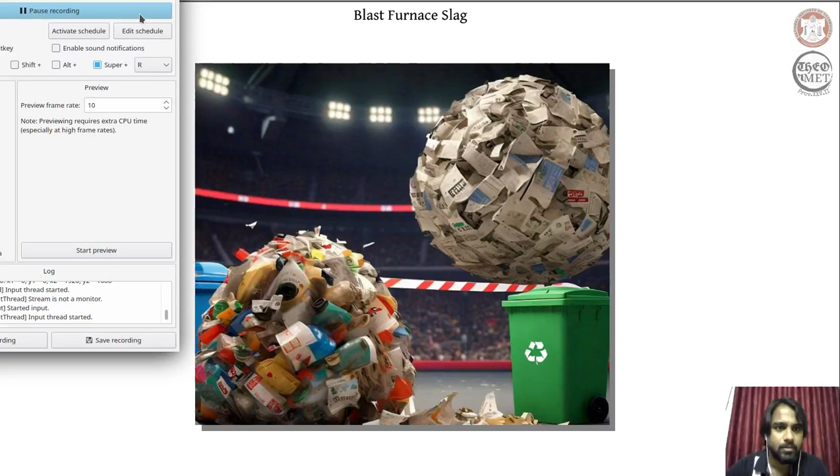Have you heard of this term anthropogenic? Despite its meaning, this term is very rarely used in a positive context. Anthropogenic means something that comes out of collective human activities. Often, pollution is something that is referred to as anthropogenic in nature.

But when you consider even pollution, the anthropogenic activity was not to cause pollution. The intent behind the collective human effort was not to cause pollution. The mind that gave us this anthropogenic activity did not intend to cause pollution. The collective human mind that unfortunately led to this pollution gave us an efficient and a safe mode of transportation.

So the transportation and the different modes of transportation we see is also anthropogenic in nature. And this mind that gave us an efficient, safer and at times luxurious mode of transportation, if directed properly, if motivated properly, can also come up with ways to manage the ill effect of the positive thing that was generated through this anthropogenic activity, this collective human effort.

So, to put it simply, the effort that gave us good modes of transportation, the same anthropogenic effort can be managed or directed towards managing the ill effect of the transportation.

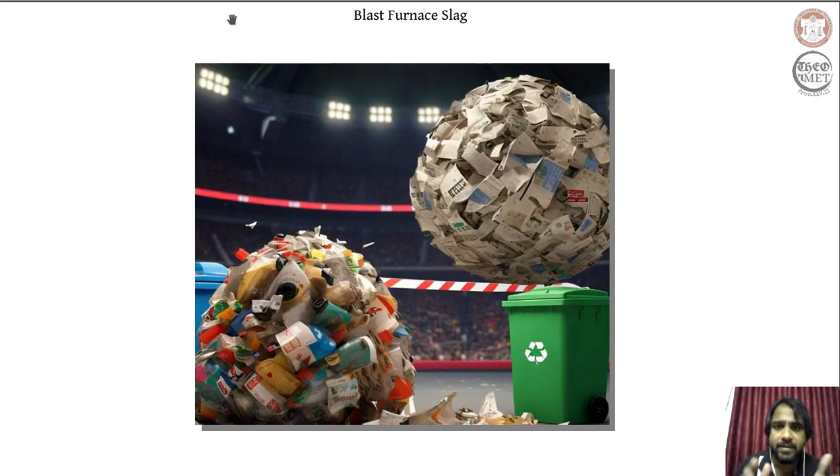One is blast furnace slag without any alteration to its chemical or physical or mechanical properties or features. We can directly deploy them, and by their inherent features, they will be able to manage certain forms of waste. So that is what we will be considering first. We are taking our blast furnace slag without altering any of its chemical composition or its physical features, and because of its inherent properties alone, it is going to manage certain forms of waste.

And secondly, we are going to modify some features of this blast furnace slag, and this modification is going to allow us to tackle an even broader spectrum of wastes. And finally, we will be treating the blast furnace slag, the waste that comes out of iron making, as a raw material, and from that we are going to extract or generate different components, which are going to ultimately tackle the wastes.

So we are going to use blast furnace slag as it is, without any modification, without any alteration; with some modification; and as a raw material, in a completely derived form. In all these three cases, we are going to use it to manage different forms of waste. So one way is without disturbing the blast furnace slag, the other way is with slight modification, and the third way is treating the blast furnace slag as a raw material, extracting something out of it, and finally using that to manage different forms of wastes.

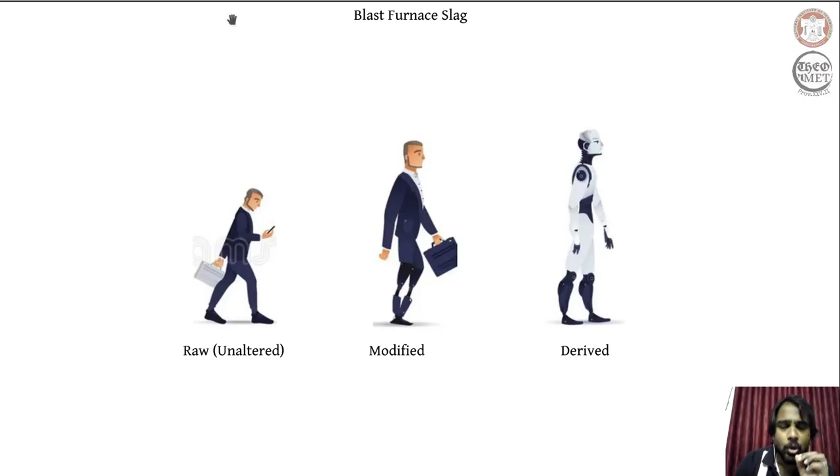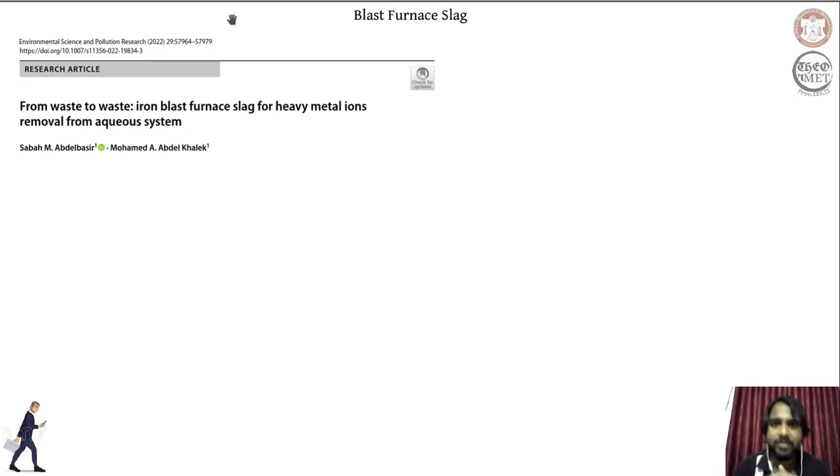As a raw material, or rather in its innate form without any modification, the blast furnace slag can be used to trap heavy metal ions, particularly heavy metal ions like lead and cobalt. Now, if you consider the ill effect of lead, lead, as some of you might be already aware, is a hazardous substance. It is not only hazardous to us, which we often treat as primary, but it is also hazardous to the environment.

Lead essentially affects our central nervous system, and it also affects our lungs. On the other hand, cobalt, when exposed to a level that is greater than permissible, causes asthma, and it also affects our liver. These heavy metal ions, particularly lead and cobalt, have a direct ill effect on our system, and they also affect our environment. So in order to reduce the amount of lead and cobalt in water, blast furnace slag has been used.

There is not much preparation involved in deploying blast furnace slag to treat water contaminated with lead and cobalt. All that has been done in this study is, the blast furnace slag is broken down into pieces, washed, and dried. It is broken down into pieces because the surface area exposed to water needs to be increased. So you take your blast furnace slag, wash the surface impurities, dry it out, and break it down into pieces, and then it is mixed with water that is contaminated with lead and cobalt.

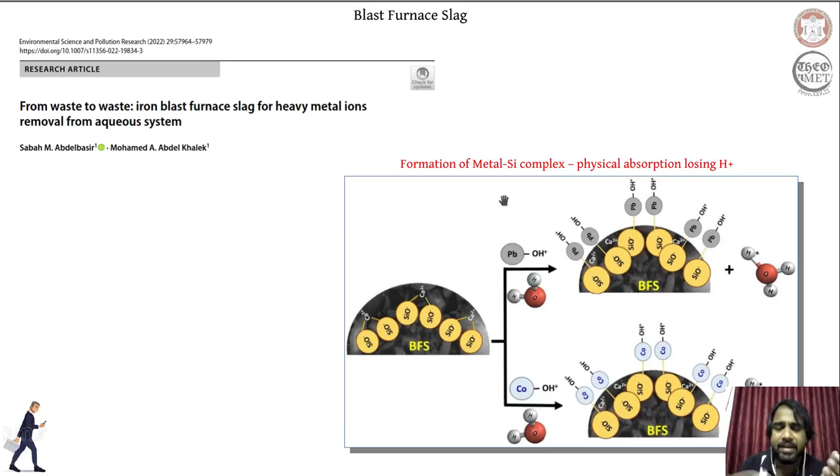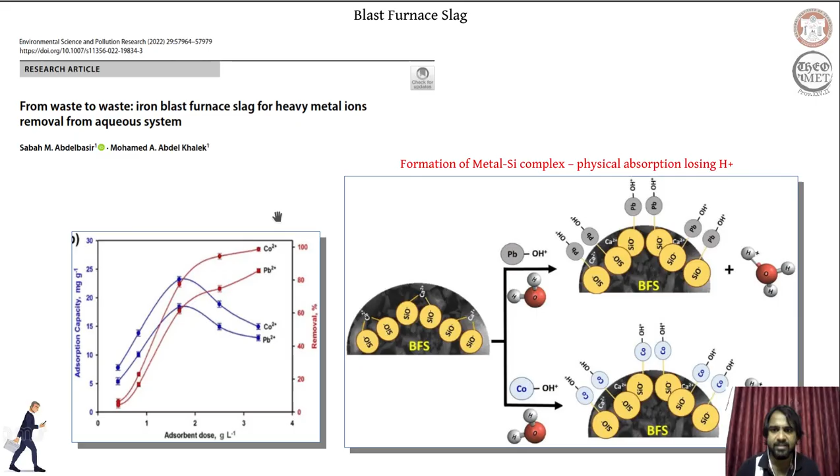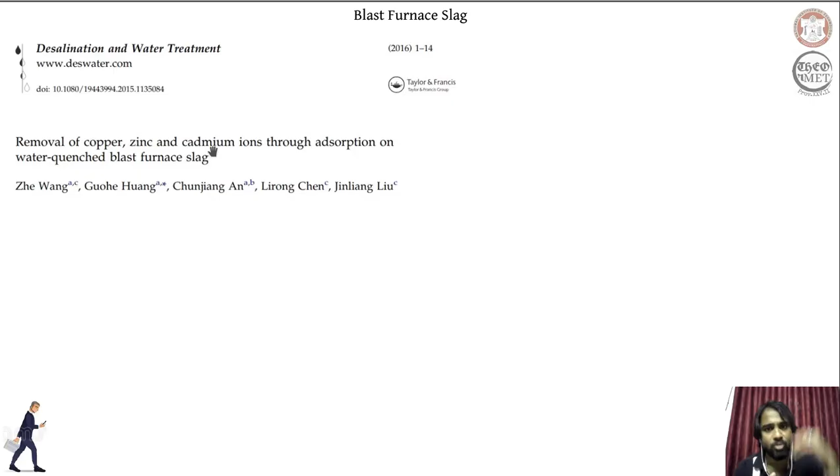This trapping behavior is primarily based on the structure of silica. And because the structure of silica is common across all forms of blast furnace slag, this behavior can be used to also trap other metal ions like copper, zinc and cadmium. Copper and zinc are nutritional in nature; some amount is good for our body and for plants, but beyond a certain limit they become hazardous. Cadmium, even at trace levels, is hazardous and affects our central nervous system. So to treat water contaminated by these elements beyond certain limits, we can use blast furnace slag.

The blast furnace slag operates similarly to how it did with lead and cobalt. Even with copper, cadmium and zinc, these elements are removed from water by forming a surface complex through ion exchange. The structure of the silica allows for such surface adsorption and complex formation, reducing the bioaccessibility of copper, cadmium, zinc, lead and cobalt to biological entities like us, animals or plants, because they get trapped on the surface of the blast furnace slag.

So the blast furnace slag is used to trap all these heavy metal ions. So in other areas, their concentration is going to get significantly reduced. So what it essentially means is the bioaccessibility, the accessibility to other biological entities, is significantly reduced.

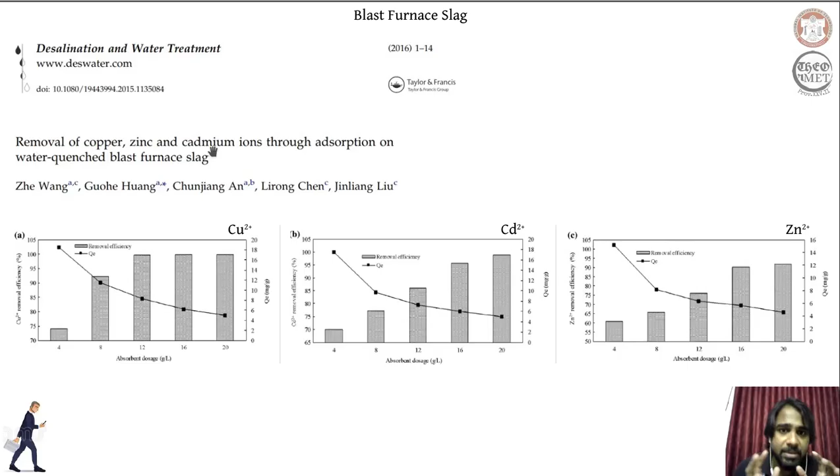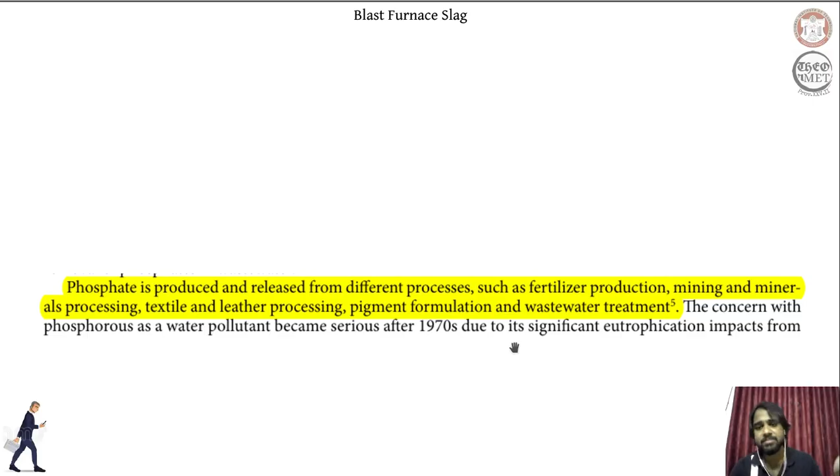Now, apart from these heavy metal ions, when we talk about the contamination of water, one other component that contaminates water is phosphate. Now, again, the contamination of water because of phosphate is an anthropogenic effect, and the source of it, as mentioned here, can be mining, mineral processing, that is all the metallurgical aspect to it, and also something like fertilizer production.

Now, one other critical component that affects the living biological entities in the water body is phosphate, and now we are going to deploy blast furnace slag to address this particular form of contamination, the phosphate contamination in water. The way the phosphate contamination in water is addressed by the blast furnace slag is, the form in which phosphate appears in water is the hydrolyzed form.

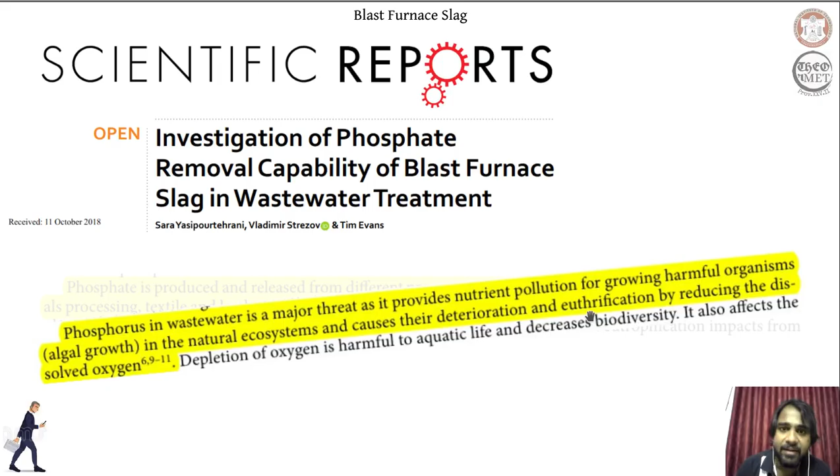Now, in the hydrolyzed form, the phosphate forms salts with calcium and aluminium, which are again the components of blast furnace slag. If you recollect, blast furnace slag is made largely of silica, silicon dioxide, and we have calcium oxide and aluminum oxide. Now, these oxides form salts with the hydrolyzed phosphate that is present in water. The form of phosphate that contaminates water is a hydrolyzed form of it.

This hydrolyzed form ultimately reacts with calcium and aluminium oxides, giving us aluminium phosphate and calcium phosphate. So the form of phosphate that causes eutrophication, that removes oxygen from the water, is significantly reduced because these phosphates are now transformed into metal salts, primarily calcium and aluminium salts, thereby reducing again the bioaccessibility or the ill effect of phosphate.

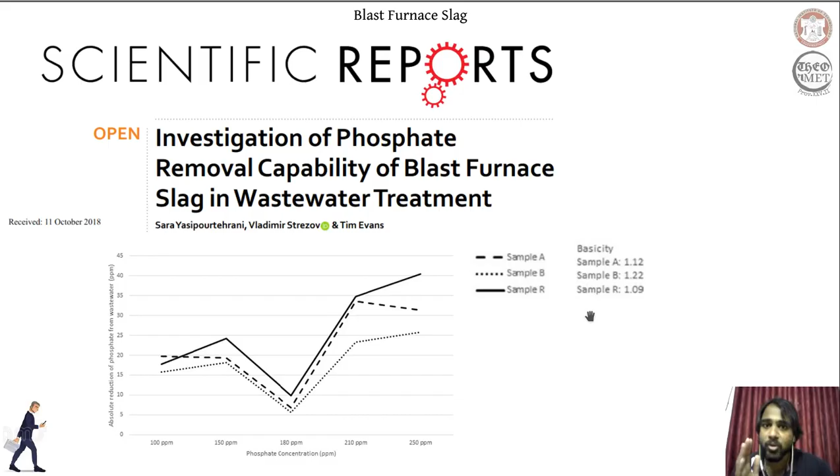Now, whatever examples we have seen so far have been fairly recent. It's just within a few years that these have been discovered, how blast furnace slag can be efficiently used to get rid of heavy metal ions. But how blast furnace slag can be deployed to control the amount of phosphate in water treatment has been around for a while. And for that reason, this approach has not only been studied on a laboratory scale, but also on a large scale.

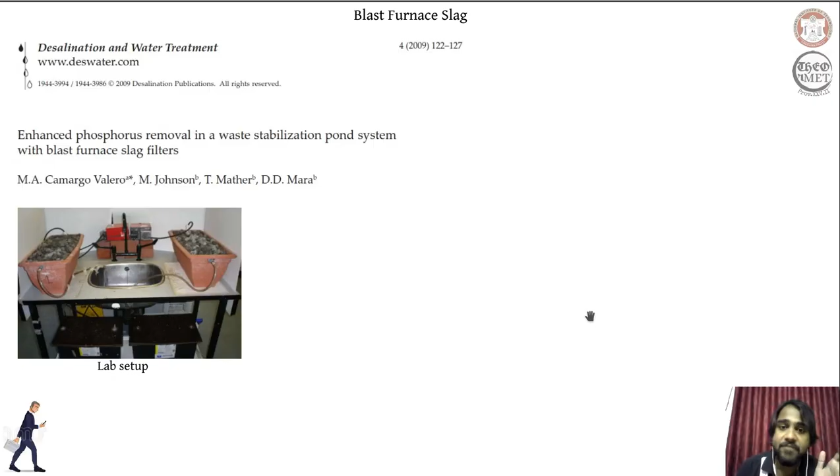So people have built horizontal filters using granulated blast furnace slag. And they have used these horizontal filters to treat water that ultimately gets into a pond. So we have a pond which is made or built artificially in order to store water. These are not naturally occurring ponds. These ponds are artificially built to manage the waters, to stabilize some wastewaters.

So our wastewater can comprise several components, and some components can be stabilized if we allow the water to interact with sunlight, if we allow some components in the water to settle down. It is not always that the wastewater has dissolved contaminants in it. It can have mud particles which are largely inert, which when allowed to settle will settle down. So for such water with inert colloidal particles in it, we artificially build some ponds. These are referred to as waste stabilization ponds.

However, if phosphate is mixed in this water, phosphate will not settle down on its own. So before collecting this water into these ponds, the water with phosphate mixed in it needs to be treated. So people have built such horizontal blast furnace slag filters. You allow the water to flow through these filters, and as it flows through, the phosphate gets collected as metal salt, and the water with less phosphate ultimately gets collected into this pond here.

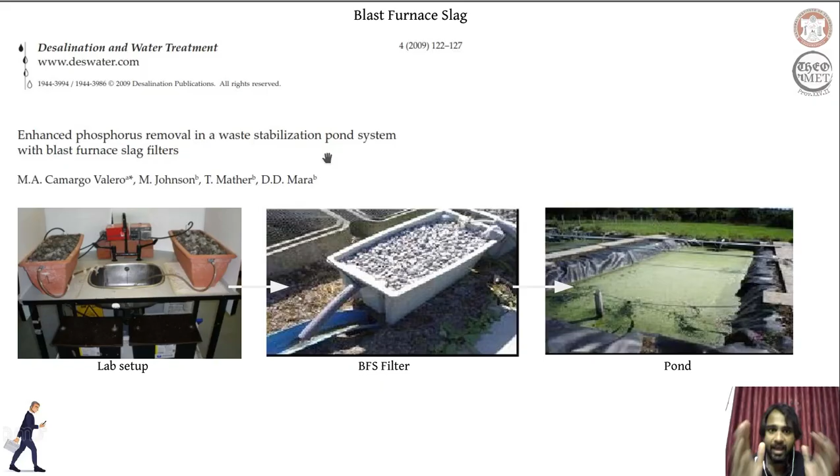Apart from the water management activities that primarily involved heavy metal ions and phosphate, the blast furnace slag is also being used to address waste content that is not so straightforward. Of course, heavy metal ions and phosphate come as a byproduct of human activities. But there are pharmaceutical wastes that are more complex in nature from a chemical perspective. When we talk about pharmaceutical wastes like carbamazepine, diclofenac and ibuprofen, these are not straightforward chemical content like phosphate and heavy metal ions.

Carbamazepine is essentially a drug that is given to a patient with mental instability. Diclofenac is rather a drug that is given to reduce pain. And of course, many of us know what ibuprofen is. So these are chemically complex in nature, and of course these are outcomes of anthropogenic efforts.

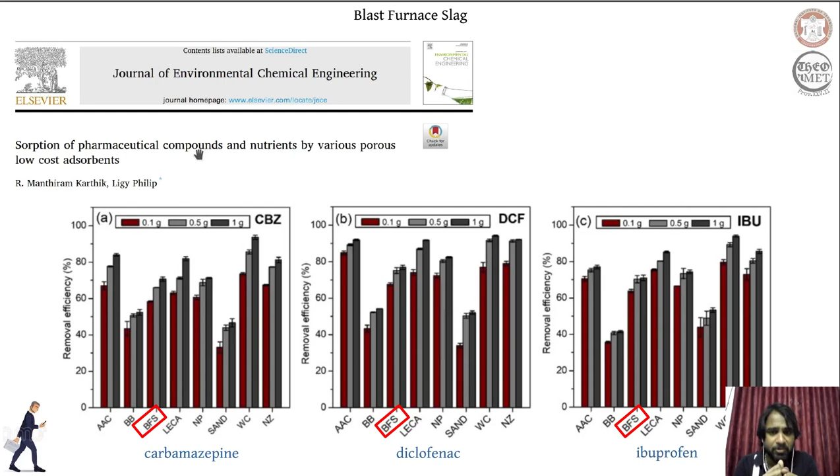Now what we are going to see in the upcoming session is what happens if we modify this blast furnace slag. So far, the way we have deployed blast furnace slag in all these applications, either to remove heavy metal ions, phosphate, or even these complex entities, is just by cleaning them, drying them, and breaking them down into pieces. We have not made any modification to the features or the chemical composition of the blast furnace slag. We have just deployed them as they are, except that we broke them down into pieces to increase the surface area.

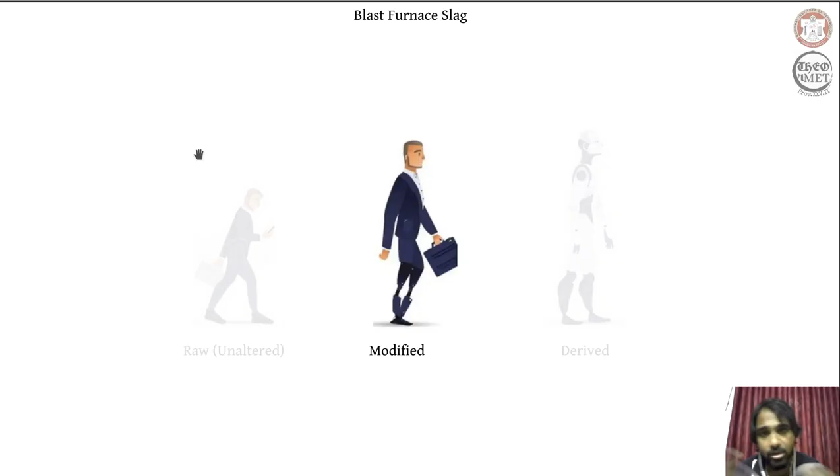Now what we are going to discuss in the subsequent sessions is how efficient this waste becomes when we modify it slightly, and where it can be deployed. So that is exactly what we will be considering in the upcoming session.